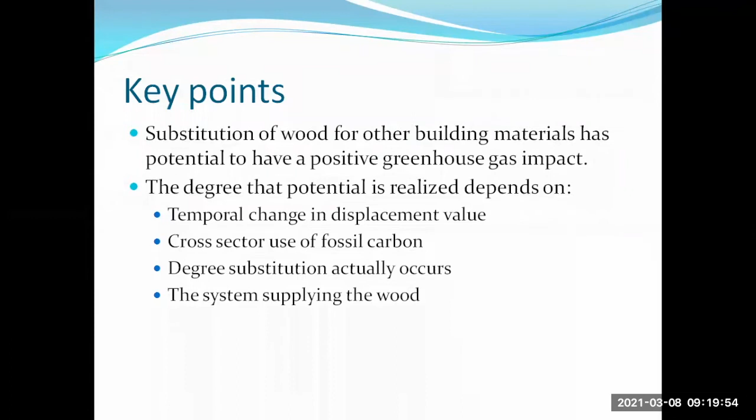Before we get into the meat of the talk, let's talk about what the forest sector is. It's the forest ecosystem, including the live plants and carbon, the dead plants and carbon stored in those, and the soil. Then there are the wood products that come from carbon harvested from the forest. Some of that is in use, and some of that is disposed, say in landfills. Then there are substitutions of products and energy.

And we also have other sectors that could interact with the forest sector, for example, the transportation sector, the energy sector. This creates a hierarchical system. We start with the live, creates dead and soil. That's the forest ecosystem. We harvest products and they store. Their use can create substitutions. And then we have other sectors that might also use fossil carbon that sort of intersect this system. So that's what we're talking about, a hierarchical system in which we have multiple parts interacting.

Now let's start with a standard product substitution story that you read in newspapers and even in articles, scientific articles. These are the general points that are covered, not necessarily in this order. So we have wood-based building materials that require less fossil energy to produce than concrete, steel, brick, or other materials. Therefore, using wood-based building materials releases less carbon dioxide to the atmosphere. We have an added bonus in that wood-based materials also store carbon, and wood is a sustainable, renewable resource and hence carbon neutral. So anything we do in the substitution arena will just accumulate carbon.

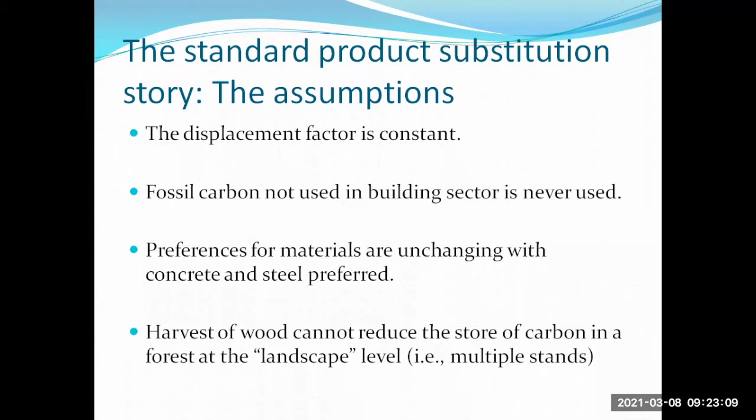If we take those assumptions, we get the classic product substitution story. And you can see down below I have the website in which this was taken from. I think the conclusion is pretty clear from the website title. But anyways, we have the various pools that I described, the forest itself and dead wood, products, etc., and substitution. And we see substitution is an ever-increasing store through time. It just keeps growing up as a straight line function.

And indeed, by the time, say, 100 years at the end of the simulation, it's as large as anything. In fact, it's the largest store. It's over half the store in substitution. Now, this outcome is based on several assumptions that generally aren't described. In fact, many of the papers, even in the scientific literature, do not specify the assumptions that are made.

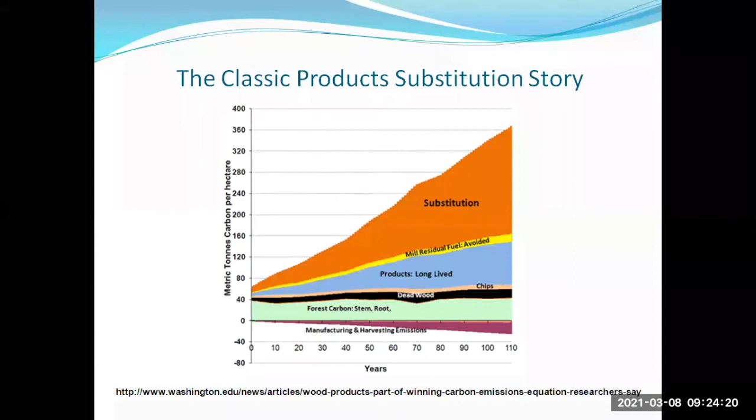So let's go through some of these one by one. The first question I have to ask is, why wouldn't the displacement factor change? For example, the manufacturing process could become more carbon efficient. Say we replace coal with natural gas, or maybe the process itself becomes more efficient. For a given amount of energy, you produce more product. Also, non-fossil based energy could be used to make many of these non-wood products.

So to understand the effect of that, we need to look into the displacement factor. What is it exactly? It's the amount of carbon not used per unit of product substitution. And mathematically, we can have the displacement factor, DF. It's the amount of fossil carbon in the non-wood material minus that in wood, divided by the difference in the amount of wood used. Now, it seems weird that in the non-wood building we use wood, but all buildings use wood to some degree. So by wood we mean primarily wood, and by non-wood we mean primarily non-wood.

Okay, so mathematically we can simplify that. I know that's a lot. Let's just assume we have 1 unit difference between the wood and the non-wood. So it really becomes the difference between the amount of fossil carbon that's used. In the equation, we have 3 minus 1. Suppose, for example, non-wood used 3 megagrams of carbon in its manufacture, and the wood used 1. The difference would be 2.

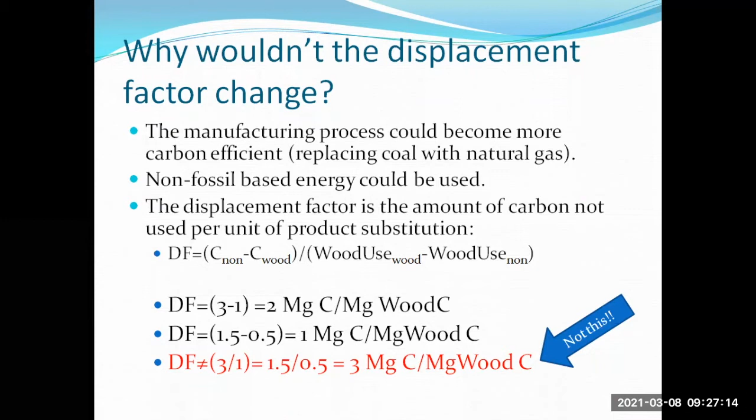Now the equation in red down below is not what the displacement factor is, but it's what most people think it is. They think it's the ratio of non-wood to wood. It's not that, it's the difference. And so if you change the efficiency, if it's a ratio, the displacement factor doesn't change. So some would argue the displacement factor can't change, but actually that's based on the wrong mathematics. It can definitely change. So what happens if we do change it?

And here's a series of simulations in which we reduce the displacement factor 25% in the red tones, 50% in the blue tones, and 100% in the purple tones, which would mean that basically we totally get off of fossil energy. And what we see is that has a big impact on the amount of product substitution we accumulate over time. And as we drive down that displacement factor, it gets lower.

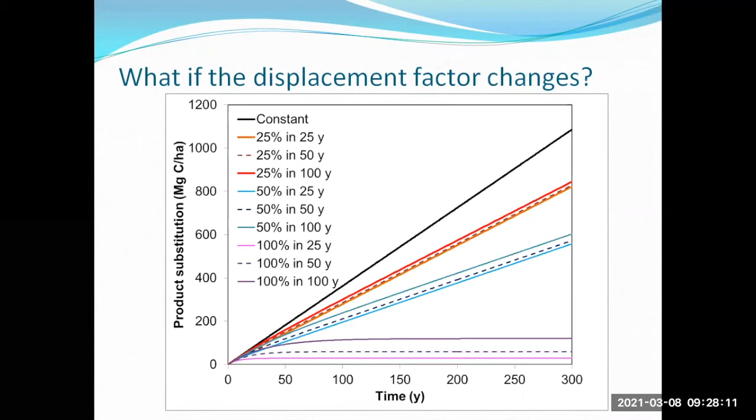And there's also an effect of the timing. You know, 25 years has a greater effect than, say, 100 years. But the primary effect is how much we drive it down. So that assumption that it's constant seems kind of dubious, and it has a big effect.

Let's change assumptions now. Let's look at what happens to that fossil carbon that isn't used in producing wood. And the assumption is that it stays in the ground. In some cases, authors have actually written that once the displacement occurs, the carbon stays in the ground forever. But does it? The current rates of fossil carbon depletion range between about 1% and 4% per year, depending on the form of fossil fuel. Coal has a lower rate than gas and oil, but these are actually significant rates.

Now, many countries have decreased or tried to decrease their fossil carbon use. So you would think that the amount of fossil carbon emissions to the atmosphere would go down, but they haven't gone down. And that's because energy demand keeps increasing. So different regions like Southeast Asia are using the fossil carbon now, whereas Europe is using less. This is a classic leakage scenario.

So to know that the fossil carbon is not used, you need to know it's still there. And that in turn depends on what it is and where it is. In general, when people talk about product substitution, they don't tell us what form of fossil carbon it is, and they don't tell us where it is. And in part, that's because this is unknowable.

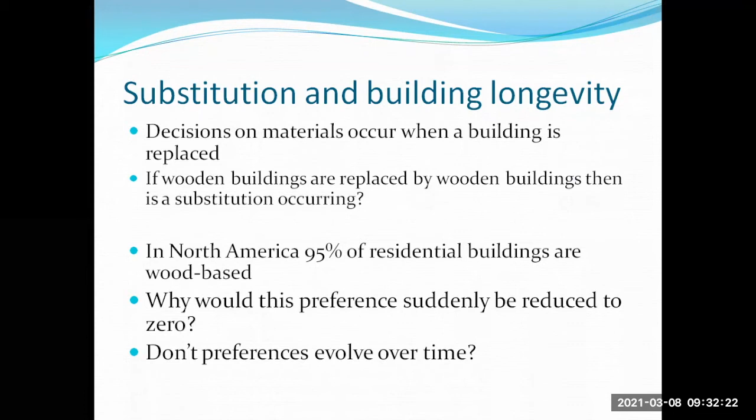Let's look at the relationship if we tie the product substitution to the lifespan of buildings. And we go from 25 years to 200 years, and then the black line, which is as if buildings had an infinite lifespan. And I say as if because they actually act that way even if they don't have an infinite lifespan. So what we see is even if the buildings lasted 200 years on average, and this actually means that there are buildings that exceed 200 years, we would have a significant decrease in the product substitution value.

In actual buildings in North America, it's probably more like 50 to 100 years, somewhere in that range for the average lifespan, and that has a very large effect. So again, this assumption is very critical and has a huge impact on what we see in terms of the substitution accumulation.

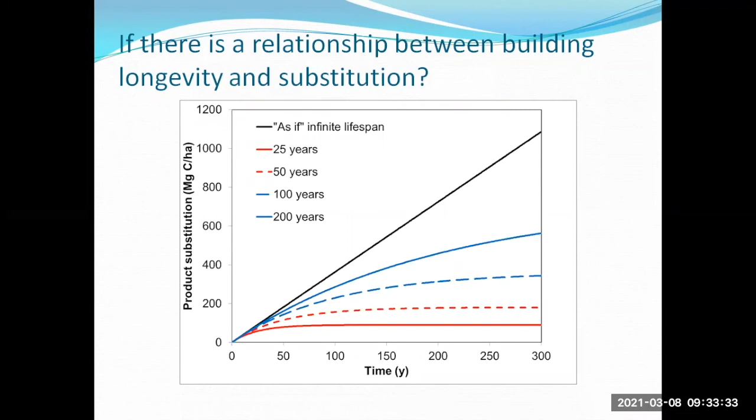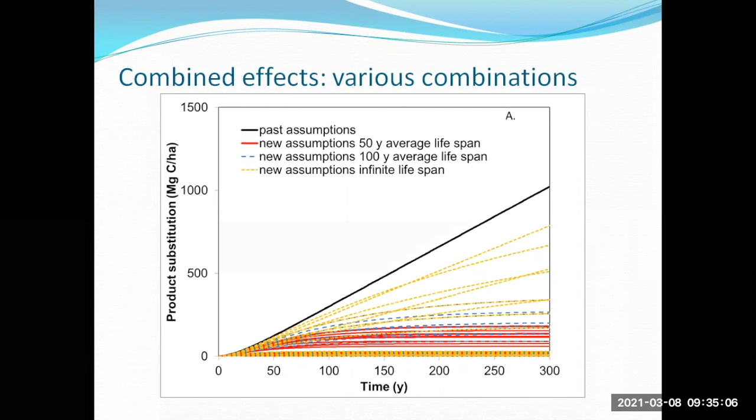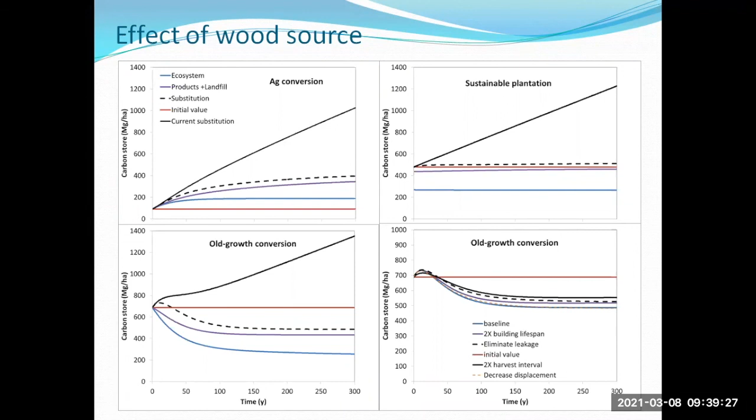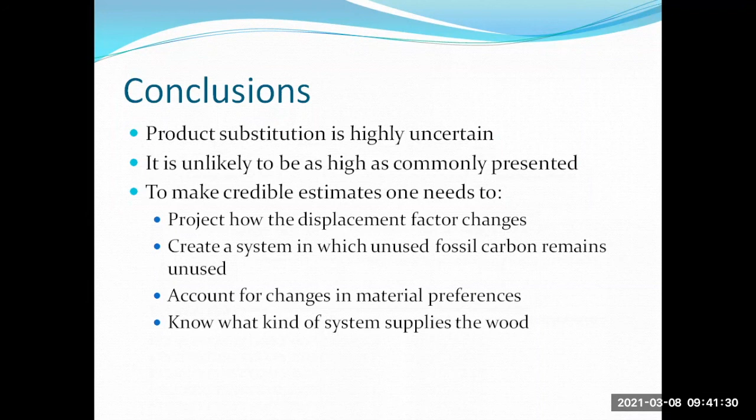And finally, we need to know what kind of system is actually supplying the wood. Without that, we really cannot tell what the effect on the atmosphere is going to be. This turns out to be a very critical assumption, and one that perhaps we could do a better system of actually tracing where the wood comes from so we understand the carbon impacts.